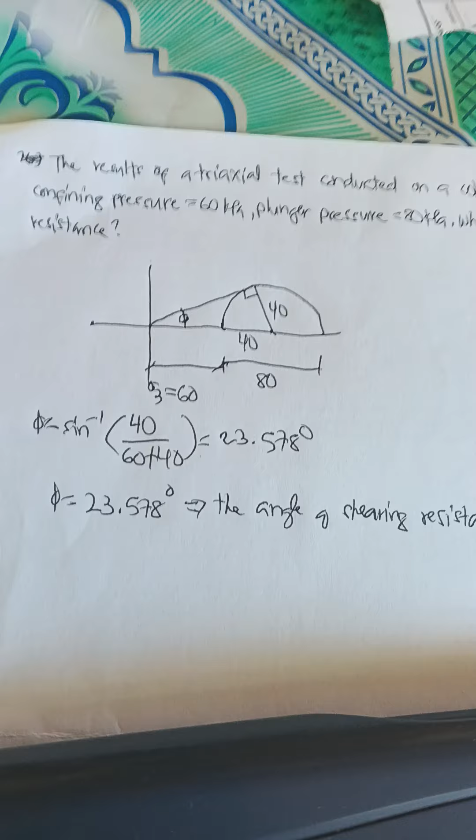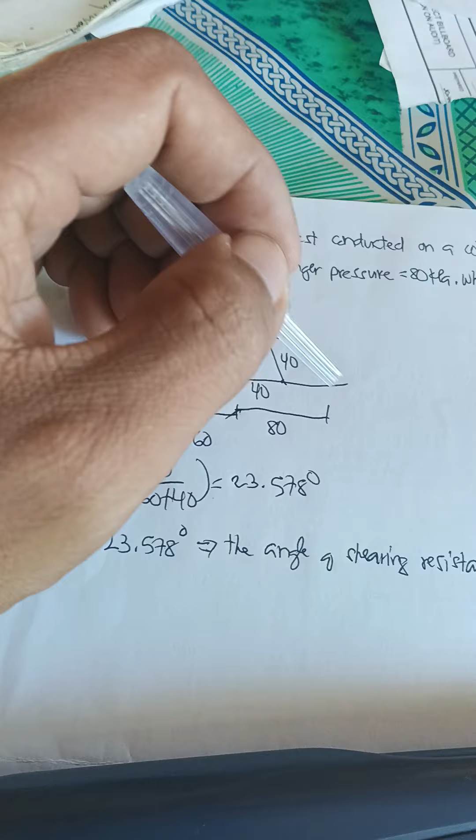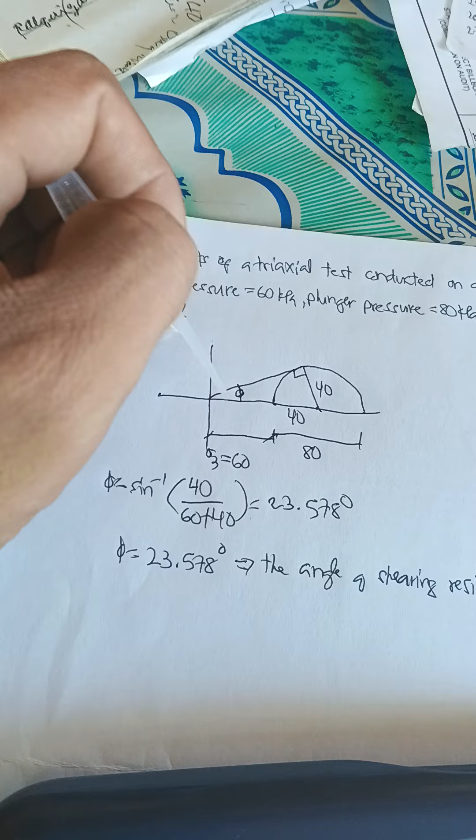Our solution: we draw the XY plane, and in this portion we put the half of the circle, and our confining pressure equals 60 kilopascal. From the origin to the beside of the half of the circle, this is our confining pressure, length equal to 60 kilopascal, and the plunger pressure equals 80 kilopascal.

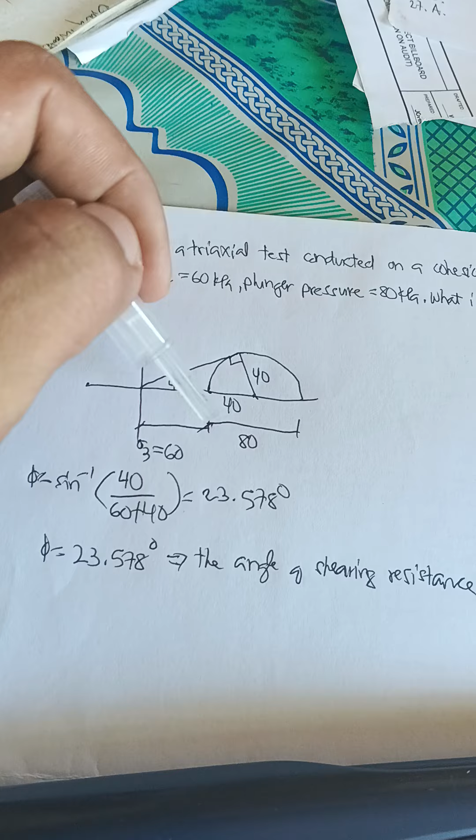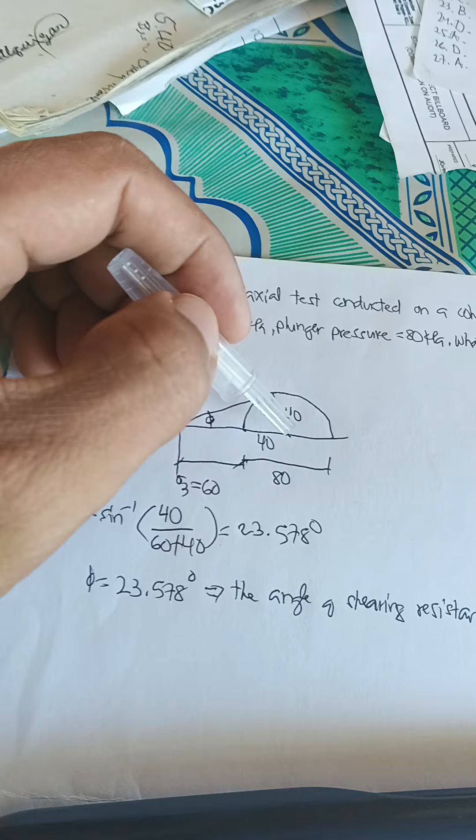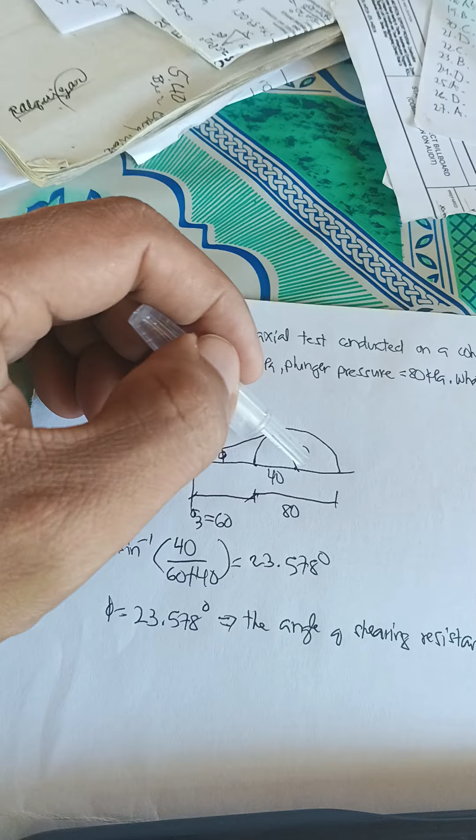The length of the plunger pressure, 80 kilopascal, is the diameter of the half of the circle, and here to here is our radius. 80 divided by 2 is equal to 40, our radius. And from here to here is also our radius, 40 kilopascal.

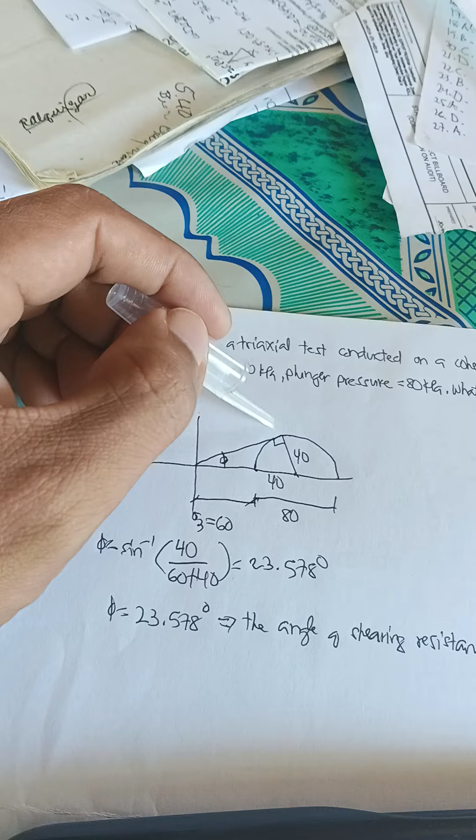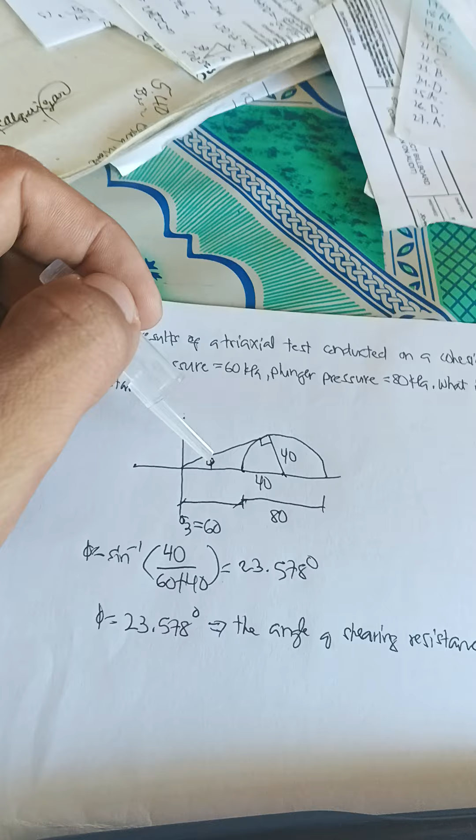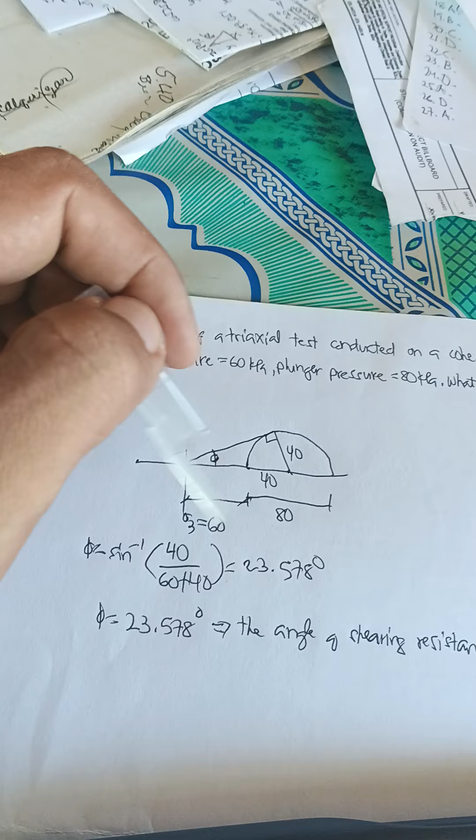From this figure, from here to here to the origin and back to the center of the half of the circle, this forms a right triangle. So sin phi, the angle of shearing resistance phi, is equal to opposite 40 kilopascal over the hypotenuse 60 plus 40, is equal to 23.578 degrees.

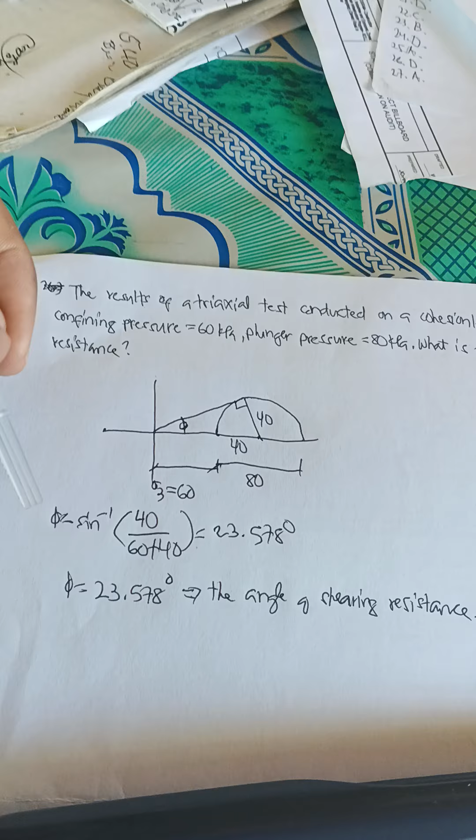Or we directly use the formula phi equals arcsine of 40 over 60 plus 40. This is also the same, equal to 23.578 degrees, the angle of shearing resistance.